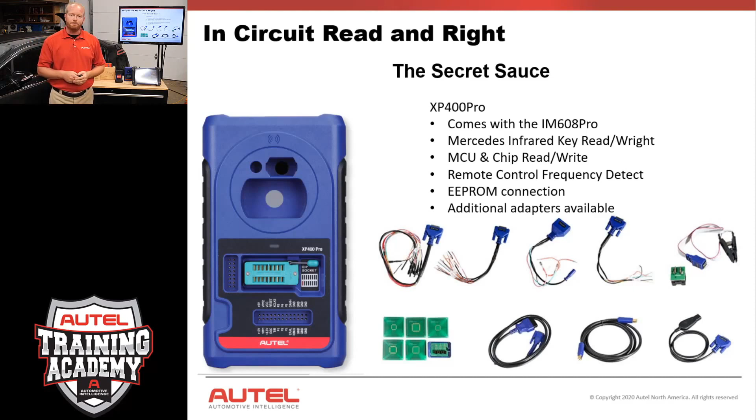But you already own an IM tool and you don't want to spend the money on a new one. I know, I get it. And we wanted to make sure that that didn't happen. We wanted to make sure that you could get the new functionality of the IM608 Pro without having to go back and buy a brand new tool. If you just bought an IM608, there's no problem. We thought of a solution for that as well.

So the XP400 Pro can be added to your IM508 and your IM608. That's right, this can be added to your IM508 to add all the European coverage plus all of the new European coverage that we just talked about with the IM608 Pro. This can be added to your IM608 to become a Pro, and that gives you all that same functionality. So with that one little device added to your tool, you now have all the same functionality as a brand new tool.

Now, the IM608 and the IM608 Pro are going to be running on the exact same tablet and the exact same software. So if you are an IM608 owner and you get an indication that you have to have a hardware upgrade, that is why. You're trying to do something that the old XP400 is not able to do with its current chipset, and the XP400 Pro can. So they're recommending on the tablet that you upgrade to be able to do that functionality.

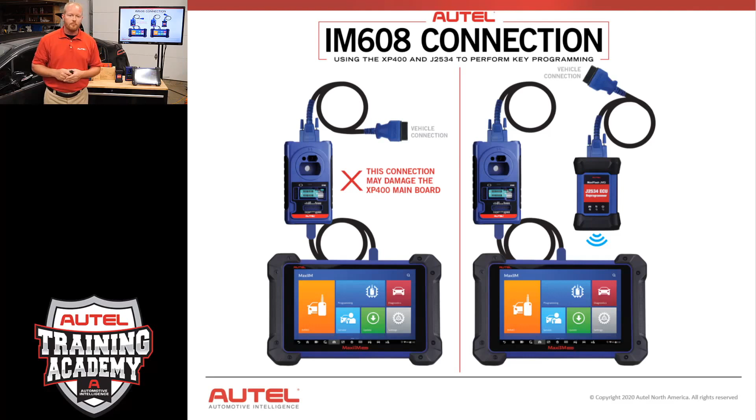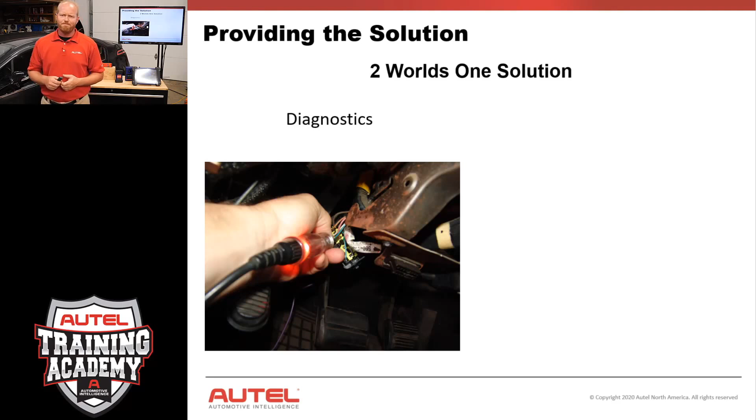So, providing the solution, there are two worlds that are colliding at a very rapid pace right now. The first world is your mechanic. And the mechanics that are sticking test lights in places that test lights aren't supposed to go, jamming it into circuits and trying to see if there's power and grounds and just messing everything up. And then we have the key slingers, right? We have the locksmiths that have to come in and save the day and try and fix all that. But both of those worlds are really combining now.

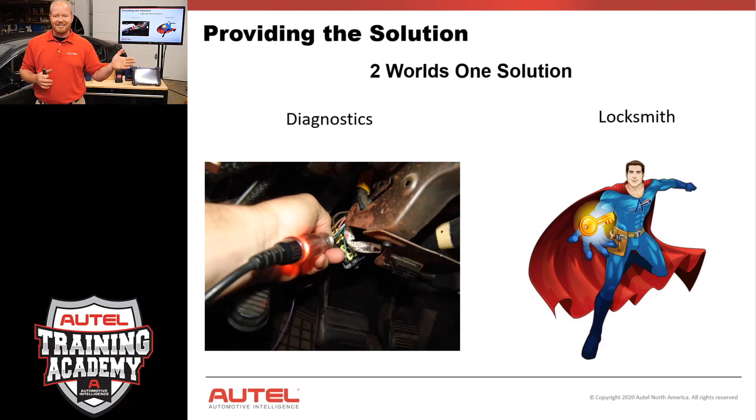No longer can we talk about a security system in an automotive car without talking about the network of modules and all the other systems in the car. When we look at some vehicles, we can see that the security goes well past just the immobilizer box, into the dash, into the body control module, heck, even into the transmission control module. So security systems are going much broader in a vehicle to be able to program those keys. So even in the locksmith world, we have to be able to access that diagnostic side and make sure that the systems are all working together.

The IM608-PRO really is that complete set to merge both worlds together, because it has complete diagnostics, active test, special functions, and live data. We can see anything the computer can see. We can control anything the computer can control with this scan tool. Plus, we have the complete key programming side, mainly done via OBD, but we can do the EEPROM as well. And here you can see we have the IM608-PRO and the KPA set all together as one.

So if you're the guy that says, I'm just slinging keys and I don't need no diagnostic tool, you are the guy that's fading into the past. Being able to do automotive locksmithing is now going to require more and more tooling, more information, and more access to that vehicle. So make sure you're staying current with the systems and the training on these systems.

With the diagnostic side, we're going to talk about pre-scan and post-scan. This is something new to the world of locksmiths, and it's something I highly encourage just to protect yourself. What a pre-scan and post-scan is, is basically we're going to go in and scan that vehicle before we do anything, for codes and issues. If we're just adding a key, or even if it's all keys lost, we want to try and scan for codes on that vehicle.

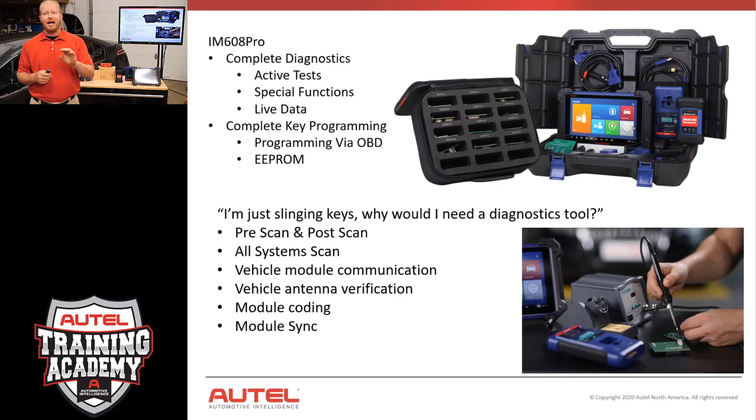So let's take a look at the IM608-PRO and what it looks like. Here's our main screen for the IM608-PRO. You see you have your immobilizer, programming, diagnostics.

These tools are super duper easy when it comes to update - you push the green button. And I'm going to tell you right now, these tools update about every week to every two weeks. And the number one call to my tech support line is 'this function doesn't work.' And did you update your tool? No. They update the tool and now it works. So keep your tool updated, it's as simple as pushing a button.

So the first thing we're going to look at is diagnostics. When we look at our diagnostic screen, we're going to go in and we're going to see the VIN up here in the top left corner. And what that is going to do is give us the ability to auto-detect that car.

So we're going to select auto-detect. It's going to go in and start communicating with that car. It's going to ask information like year, make, model, VIN, engine size. It's going to try and get all the information it can out of that vehicle. Whenever we do that, it's going to list all that information, including VIN, year, make, and model, all that good stuff. From there, we can do an all-system scan.

Whenever we do an all-system scan, it's going to go through every module and it's going to talk to it. It's going to say, are you here? And do you have any codes? From there, we can see any codes that are available by clicking on Report.

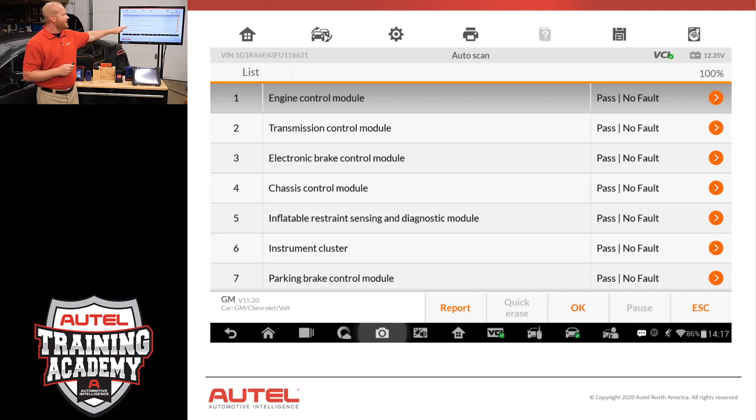And that is also how we do our pre-scan and post-scan. We can select Report, get all that information, and do a wireless print or email, your choosing, of that report out to the outside world. Whenever we're in diagnostics, we can click on the little caret there on the right-hand side, and that will take us into live data. When we're in live data, we can change the way we see that information.

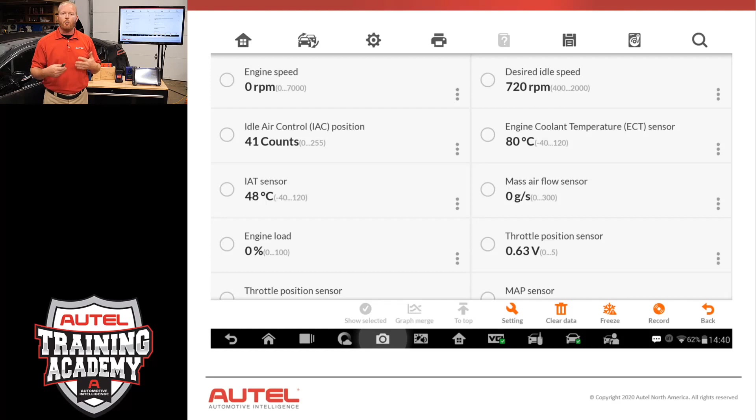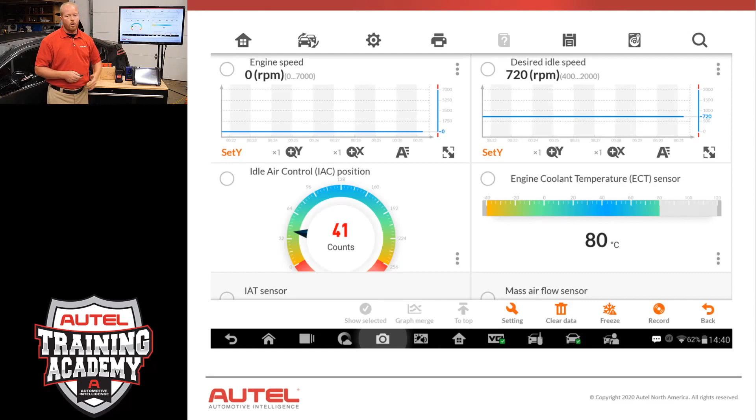So let's say we just need to see how many keys are programmed to this vehicle. No big deal, we can do that in a numerical sense. But if we have other issues we're trying to help a customer with or trying to decide, we can also change those to a graph. We can graph merge, or change those to a dial or bar graph, if we need to put multiple graphs on top of each other on one screen to make sure everything is syncing and talking to each other.

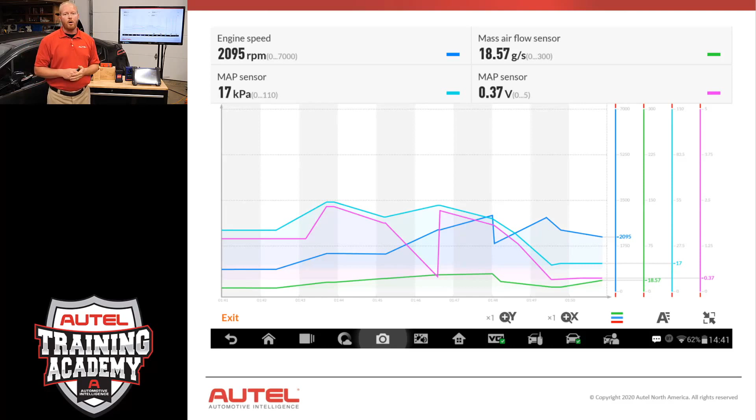I'm not telling you to become a mechanic. I'm not telling you to become a diagnostician. I'm telling you that it's available if you get stuck and you need it. You have it on the Autel IM608-PRO.

So let's go back to the main screen. On the main screen, you're going to see immobilizer and programming. Programming is really where we're going to focus on the EEPROM side of the world, doing our chips and components. We're going to go into immobilizer, and this is really where we'll focus the majority of our time on programming keys via OBD. We have the smart mode and manual mode we talked about before, the system selection, ECU Renew - all those functions are going to be underneath the immobilizer icon.

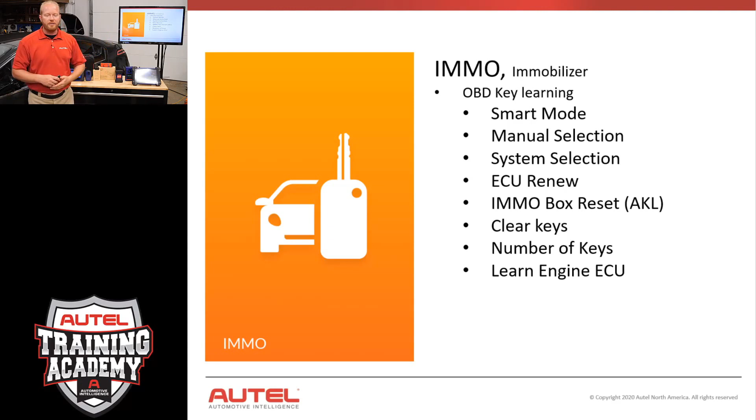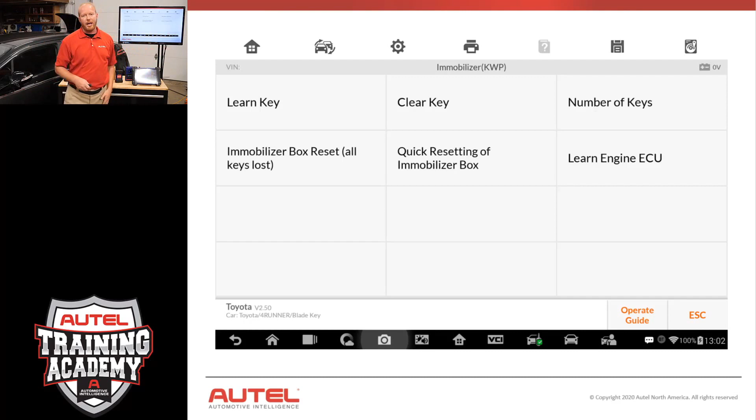Whenever we select the immobilizer icon, it's going to come into a main screen. This particular one is on a Toyota, and you're going to see all the features and functions you can do. One thing I'd highly recommend if this is new to you is to go down here to where it says Operate Guide. If we select that icon, it's going to give us information about that vehicle - it'll tell us what everything on that previous screen meant, the definitions of all those terms, and what to do when we click on them.

We're going to give you precautions. Like on this one, for instance, on a Toyota, a learned master key is required for performing a key learn. All those precautions are going to be in there to give you the most information before you take the next step. Again, this is so you know what you're doing, or so you can talk to your customer to make sure you have everything in place to do that next step.

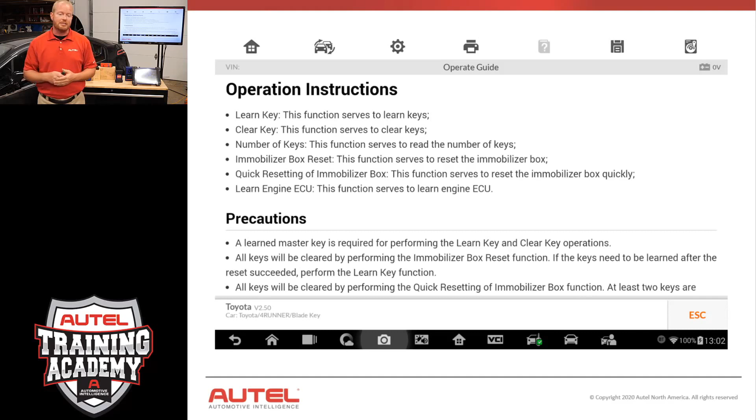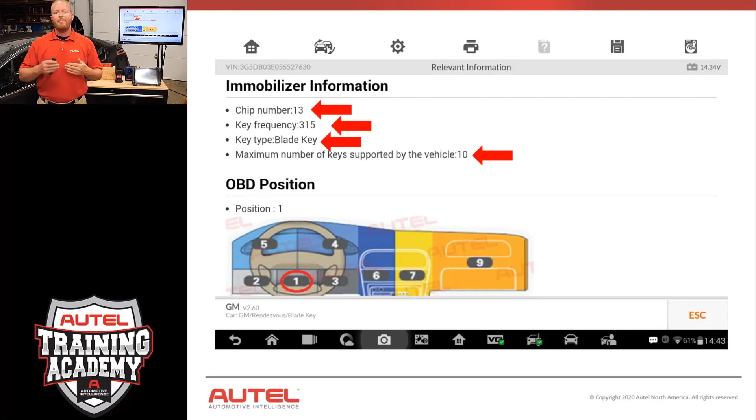When we cycle down, you're going to see more immobilizer information - the chip number, key frequency, what type of key it is. This one in particular is a blade key, and the maximum number of keys supported. Whenever we look at a Hyundai Kia, they have a maximum number of keys that's very low, so we want to make sure we know how many keys are programmed into that vehicle and what the maximum number is, to save ourselves time and hassle. We'll also show you what that key looks like to make sure we're in the correct selection. All that is built into the Operate Guide on the tool to help you as a technician or locksmith do this part of the process if you're unfamiliar with that specific vehicle.

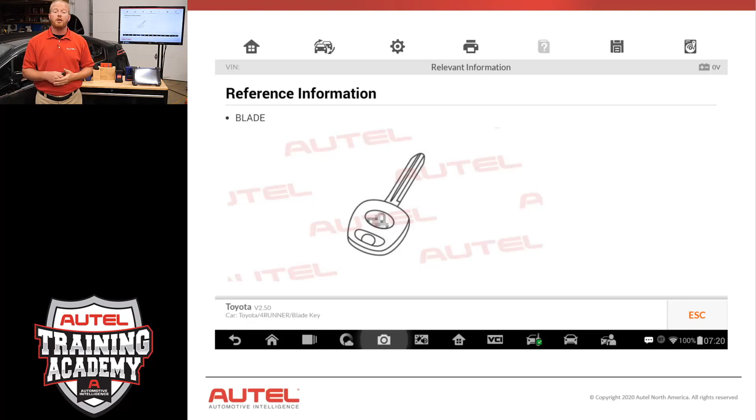All right, let's talk about accessories and how all these accessories tie together. So if you are the proud owner of an IM100 or an IM508, you can add the XP400 Pro to your IM508 or IM100 to add all that EEPROM and European functionality.

Then you can add on the KPA set to do the key programming accessories. If you have an IM608 or IM600, same idea - you can add the XP400, and once you add that, you can add the KPA to add those extra functions. We're not going to brick your tool. It's not stop, do not pass go. It's just adding an accessory to your tool to add those extra functions if you want them.

We also have a couple other accessories. One of those is the G-Box 2. This is mainly going to be used as a breakout box for your Mercedes, your BMWs, sometimes even our Toyotas. This makes our programming much, much faster when it comes to programming keys. It gives us the ability to pull out the DME and the DDE ISN, and to do some Volkswagens and all-keys-lost calculations much faster on Mercedes cars through that whole process. The second one is the APB112 - this little guy right here - and that gives us the ability to emulate the keys on a Toyota.

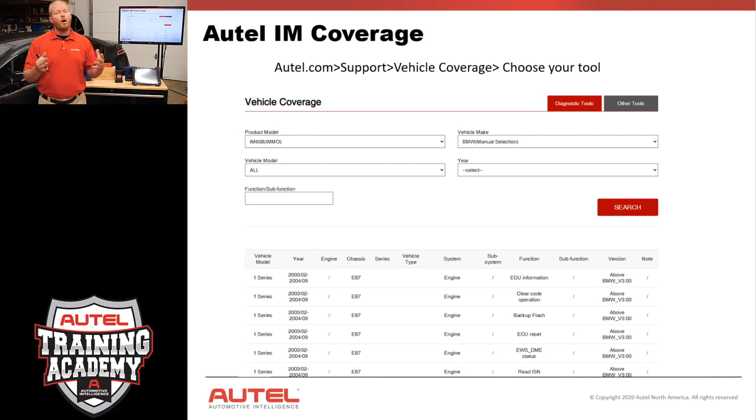So the first way to see our coverage is by going to the Autel.com website. If you go there, on the drop down you'll see one that says support, and then vehicle coverage. You can choose your tool, whether it be an IM508, IM608, or IM608-PRO. Once you choose your tool, then you can choose what brand and what specific model of vehicle you want to see. If you want to see all of them, you can. And then it'll tell you what we can do in that specific vehicle, whether it be all keys lost, add a key, erase all keys, immobilize, or reset. All those functions, we're going to show you how to do that directly on that website.

Now, if you're on your tool and you want to see what you can do or cannot do, you can go to Function Viewer down in the bottom left-hand corner. Did you see that? I just slid the screen to the side. No big deal. Function Viewer is right there. It is the same information as you're going to get from the website, just on an Android platform, so you can search it a little bit easier and better. So all that information is already contained on the tool, and that is on the IM608, IM608-PRO, and the IM508 as well. So I hope that helps.

I hope that cleared up a little bit of the confusion around the new IM608-PRO. It just adds more features, more functions, more benefits, and more functionality for your EEPROM world. With that new XP400 Pro, that gives you the ability to do that extra functionality. It's really built into this box right here.